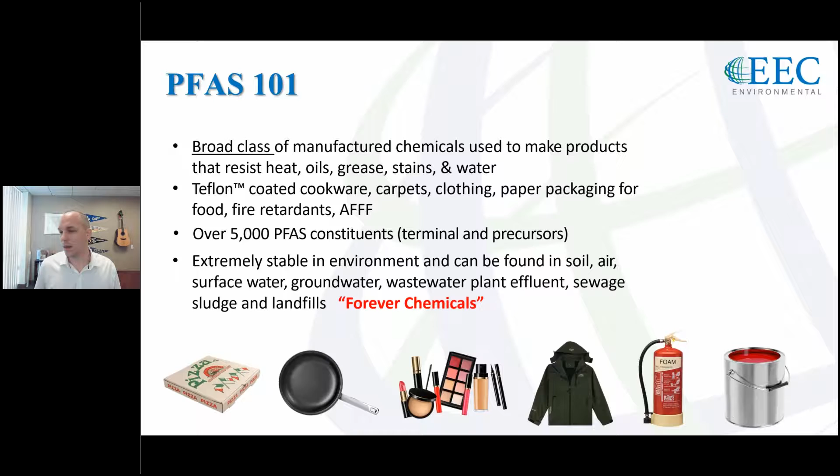A little bit of treatment terminology here that is going to help facilitate this discussion and some of the topics I'm going to talk about. We talk about treatment, PFAS treatment, and what does that really mean? Or PFAS removal. Those terms, treatment and removal, are really general terms that talk about really just taking PFAS out of something. And what does that look like? Well, there's a couple different ways that you can do that. And when you really get down to it, we're talking about

separation technologies. When we're talking about treatment technologies for PFAS, really what we're doing is we're separating PFAS from one process stream or one media into another. So we're not altering the chemistry of PFAS per se when we're talking about these separation technologies, and we're going to go into examples of those, like GAC or ion exchange or RO. We're not changing the PFAS with those technologies. We're really just separating them from the water column, maybe adsorbing them onto a physical media.

And then the other kind of technology within PFAS treatment would be concentration technologies. This is where if we're working within a specific media, like within a liquid matrix, water, for example, technology like foam fractionation will pull the PFAS or concentrate the PFAS within that existing media. And so foam fractionation pulls a lot of the PFAS up into a foam on the top of the water. And so we're concentrating that PFAS. You may have a much higher concentration within the foam than you would within the water column. But again, we're not altering the chemistry of those PFAS constituents necessarily.

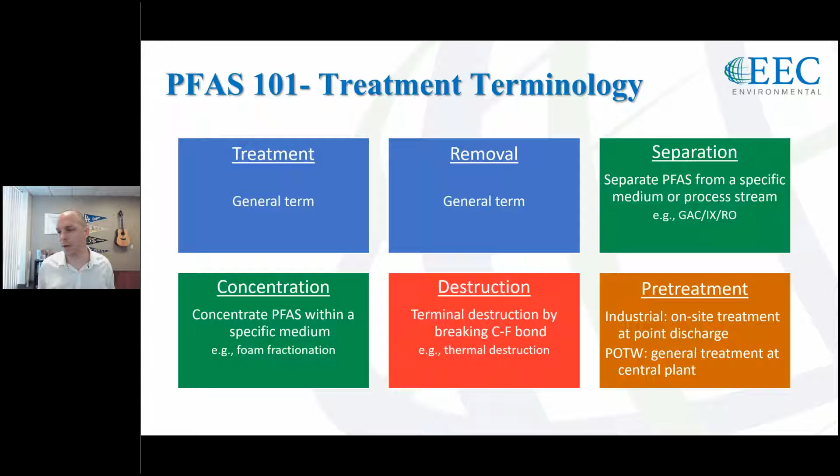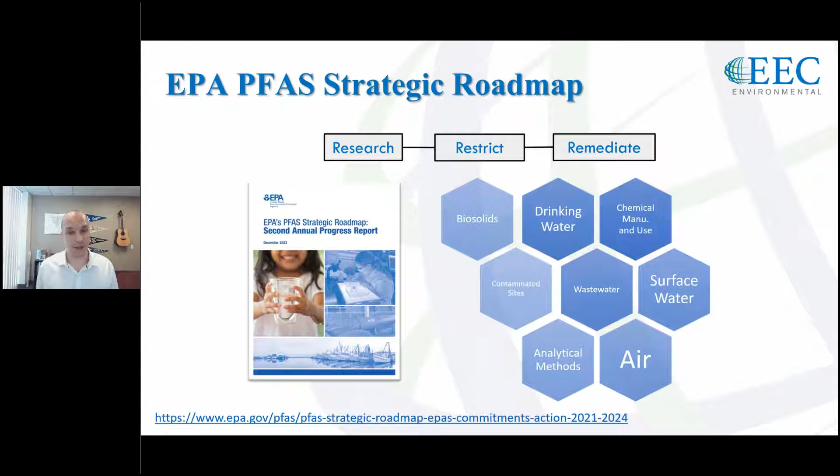Those MCLs are going to be what drives a lot of public water systems across the nation to put in treatment for PFAS if you're above the MCLs and you've got to comply with that MCL. So that's going to be extremely important. That's kind of the first big shoe to drop, if you will.

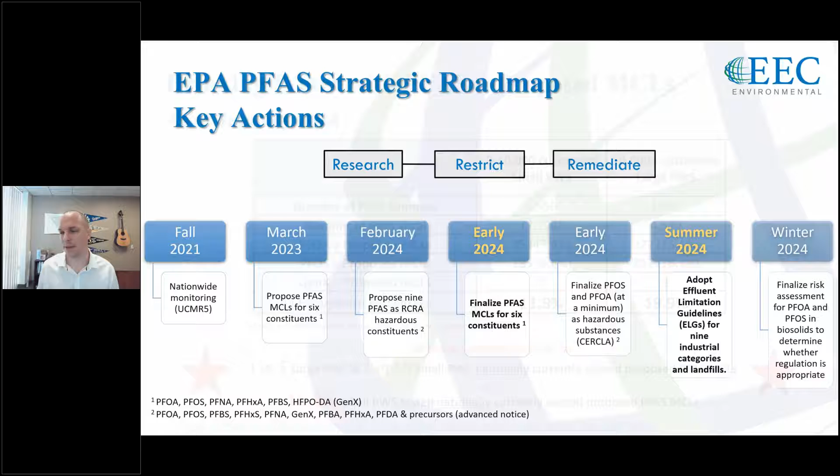I also highlighted here summer 2024, the EPA says they want to adopt ELGs, effluent limitation guidelines, for a number of key industries known to have PFAS and contribute PFAS to the environment in a myriad of different ways. That is more on the wastewater side of things, and that's going to trigger certain industries to put in pre-treatment of PFAS before they discharge to the municipal treatment plant. So those are two key actions that the EPA is planning to take, two key regulations that would drive the need to put in treatment. So I wanted to highlight those here today, and those are early 2024 and summer 2024, which will be here before we know it.

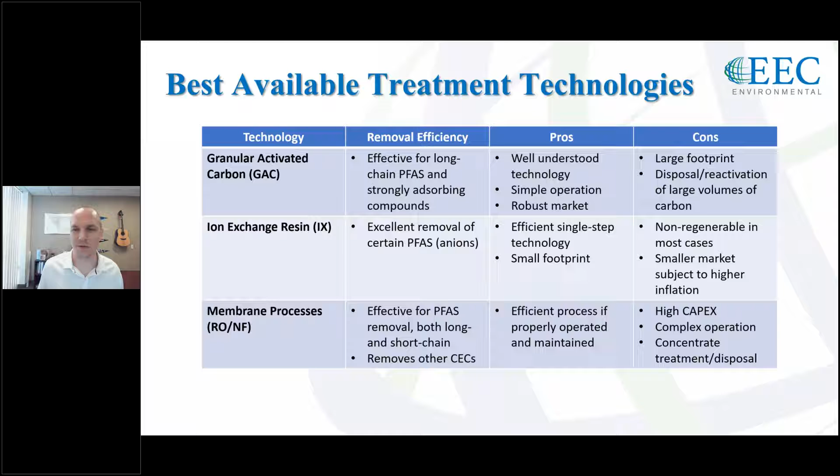So let's look into a little bit more detail on those adsorption technologies, like I said, GAC and ion exchange, and I'm going to add into here novel adsorbents. And it's not necessarily important to understand the difference between every type of GAC or every producer of GAC or ion exchange resins. There's plenty of pilot studies out there that you can look up that have determined the relative effectiveness of each one of these, looking at the breakthrough curves and how long each one is going to continue to treat for PFAS and what the adsorption capacities are. But I like this visual here so we can kind of wrap our heads around what is the difference between GAC, ion exchange, and novel adsorbents.

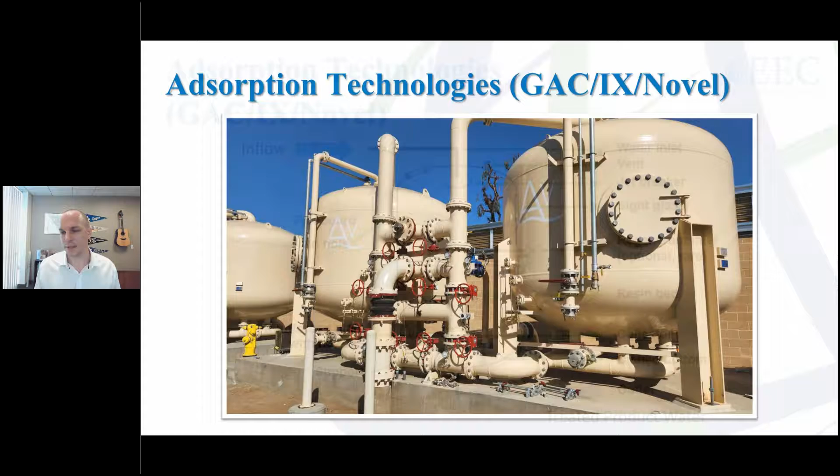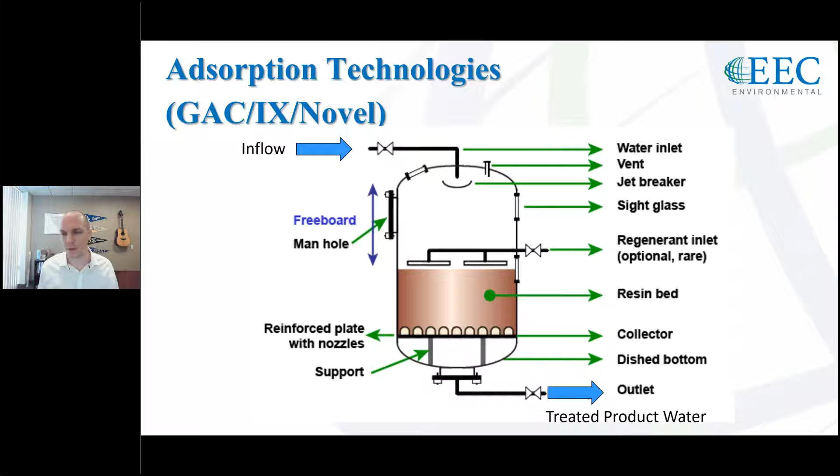And then we've got a couple of different parts to that. We've got manway access for maintenance. We've got a vent there. But look, by and large, this is what we're talking about: flow-through technology in a pressurized vessel that takes advantage of that adsorption within the physical media bed here.

And for GAC, what does that process look like? Granulated activated carbon. This is usually a carbon source. A lot of it is coconut husks that are then activated in a high heat, low oxygen environment. But what it does is the density of pores, and that's why coconut husks and shells are so widely used for this, is they have a ton of tiny little pores within there, a high density of porosity. And that pore space is where the PFAS is adsorbed onto the surface of that GAC particle.

And you saw a picture of that in the palm of someone's hand. That's how small we're talking. And then we've got all these adsorption sites on the surface of that particle. And the benefit of having a high porosity density is you actually have a high surface area that the PFAS can adsorb to. And that's why it's so widely used. And we're talking about the PFAS molecules are oleophilic. They love oil, and so they're held onto that surface as the water passes through.

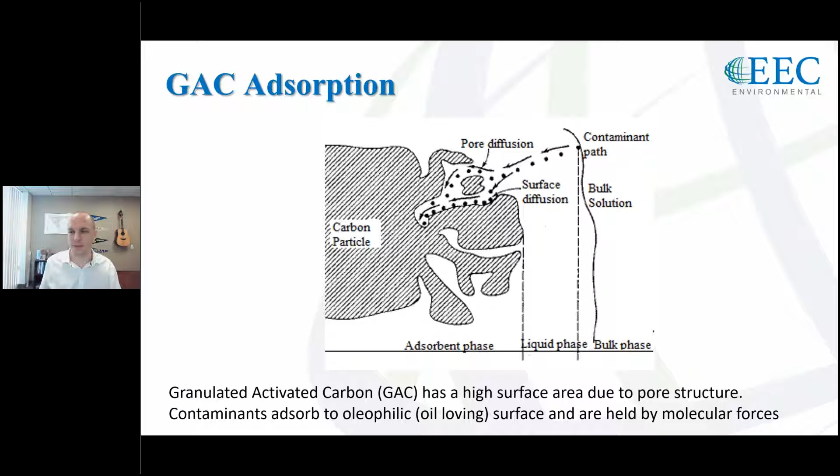Similar but different process for ion exchange. You have these ion exchange resin beads, and you saw that in the palm of my hand there, those yellow beads. And what those do is they're charged with, in this case, chloride ions, and you exchange those ions. So PFAS is an anionic exchange process where the PFAS is adsorbed onto that resin bead, and then through that process, the chloride is exchanged, and you have this harmless ion being exchanged for this harmful ion. So you get chlorides coming out the end, but you adsorb the PFAS molecules onto this resin bead.

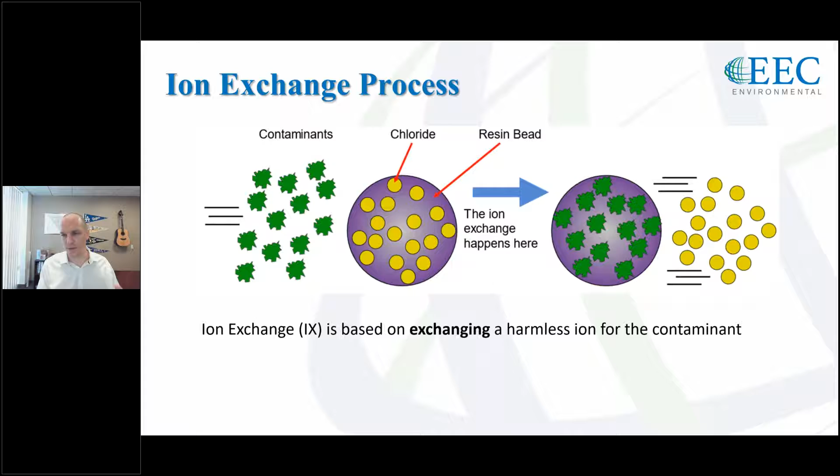And then novel adsorbents act very similar to ion exchange. They have very similar kinetics in that we talked about that flow-through rate for ion exchange versus carbon being much higher. But the difference here for novel adsorbents is they tend to have greater selectivity. And what that means is that anionic exchange process, it's not just going to grab PFAS, it's going to grab other competing anions. Well, novel adsorbents can be a little more selective to just those PFAS anions.

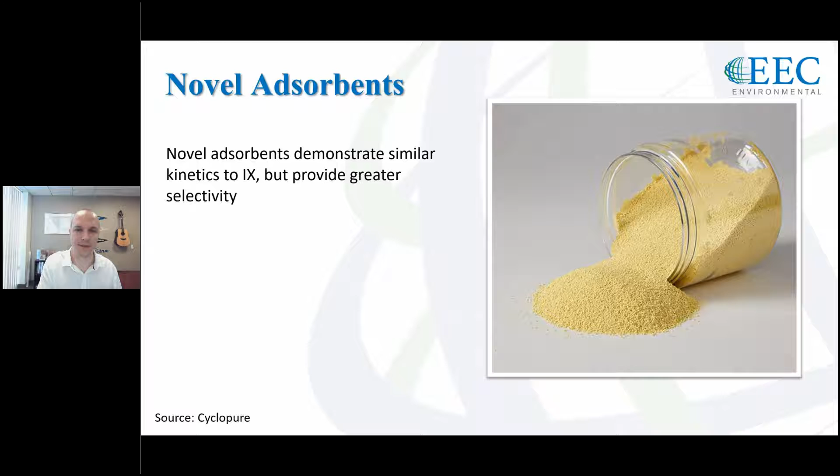And so you may get a greater adsorption capacity for your resin beads or modified clay as opposed to ion exchange, but you still get the same high flow-through or the same kinetics that you would for ion exchange, which means half the vessels when compared to GAC. What that typically looks like when we actually apply that, and there's all sorts of details that go into this. Again, we're just talking high level here.

If you have an existing groundwater source well, or it may be a surface water source like a river or a lake, we'll typically run that through pre-filtration. This may be cartridge filters or sand filtration or bag filters, but some type of pre-filtration. That's just to get the coarse solids out, in order to protect the media beds within the pressure vessels. And then we're going to run it through this lead lag configuration.

This one right here has two different trains, we call them trains, of lead lag pressure vessels. And so you're going to run through the lead vessel, and then that's going to run in series through the lag vessel for redundancy purposes. And then we're out the door here. This one has two trains. You can add 3, 4, 5. And what that does is it just increases the capacity.

So you may have one train, 2 vessels for, say, a 700 GPM well. We may have to add a second train if we've got an additional well or a higher capacity well at 1500 GPM. We may end up with 3 trains for 2000 GPM, and then so on and so forth for additional wells.

And then by the end of this process, we end up, or should end up, with non-detect potable water going to the distribution system, non-detect for those MCL constituents. As we enter the distribution system, we're going to be monitoring there and taking samples to confirm that we have treated effectively for PFAS. We're also going to sample in between the lead and the lag vessels, and that's going to determine this concept called breakthrough.

On the way out, we want to be non-detect. The detection limit, as we discussed in previous webinars, is 2 parts per trillion. The proposed MCLs are 4. Well, that's not a lot of wiggle room between 2 and 4 parts per trillion. That's why we have that lag vessel to provide additional redundant treatment. And then we monitor in the middle there to determine the breakthrough on that lead vessel, in this case PFOA concentration, and we graph that along the way.

That black line is the concentration coming out of the lead vessel. Initially, we're non-detect. It goes down to 0 here, but your detection limit may be 2. And then we start seeing it break through. We start getting detections of 2, 2.2, 2.3 along the way, and we may switch to monthly sampling once we start seeing that breakthrough. And as we approach the MCL of 4, or we may set that a little bit higher, then we're going to change out, that's the red line there. We're going to change out that lead vessel and swap the lead lag configuration.

But don't worry, we've still got that lag vessel providing the redundant treatment, and that's the concentration on the blue line going out the door into the distribution system. We're still well below the detection limit there. But this allows us to get the most capacity out of our lead vessel, and then we'll switch that configuration. So there's a lot more to be said about best management practices for that, but in a nutshell, that's adsorption technology treatment for PFAS removal for drinking water.

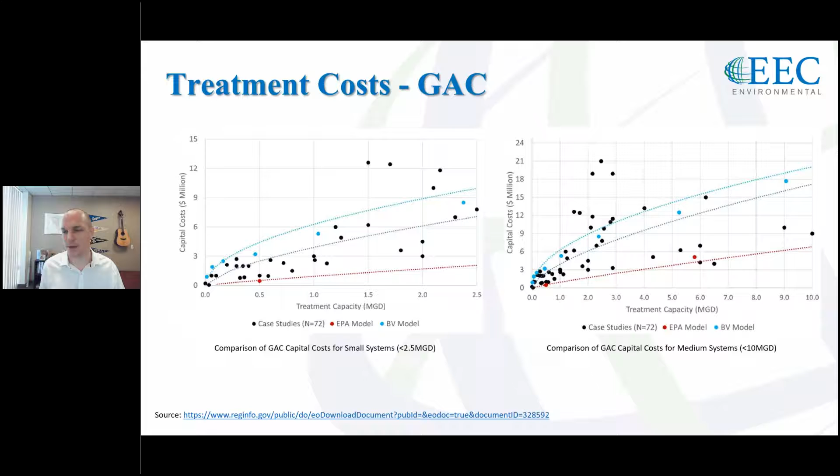If we're talking about a 1 MGD system, which is roughly 700 gallons per minute, you might be looking at somewhere between a cost of 1 to 5 million. I know it's a big range, and it's going to vary regionally across the US as well. But if you're looking at GAC installation for a 1 MGD system, you're looking at anywhere from $1 to $5 million all in to implement treatment. And then you can scale that up at higher flow rates on the right side of the graph. Ion exchange, very similar cost range, actually.

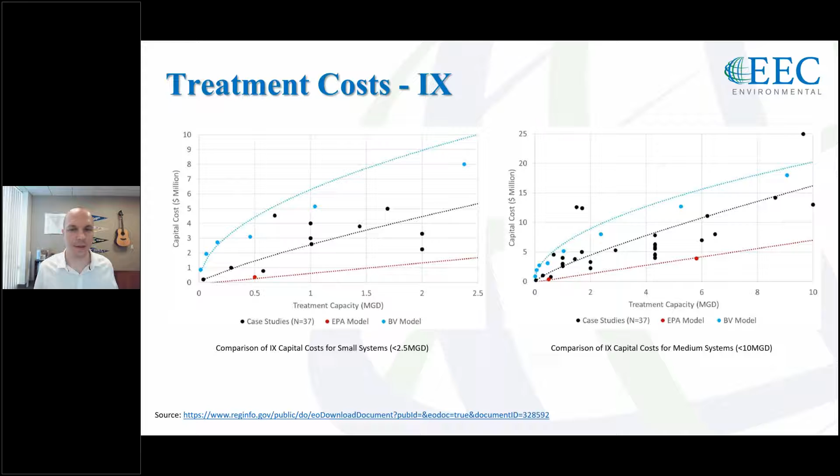If you look again at a 1 MGD, 700 GPM system, we're looking at anywhere from roughly $1 to $5 million. So if you're asking, well, Will, I have PFAS, we've done UCMR5 sampling and we're above proposed MCLs, but we're only just starting to look at what that means, this is a good way to get a ballpark cost range, and then you can start having those conversations about how you're going to fund these capital improvement projects. And when we talk about funding, I'm going to move to RO here as well and just demonstrate here.

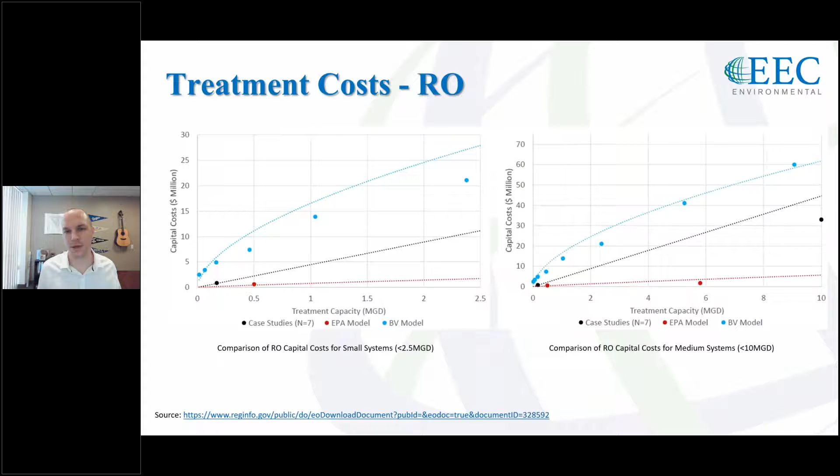When we talk about funding, I'm not going to talk about funding options here today, but I would point you back to the MCL presentation I did for the EFC, where we do explore what some of those funding options are between federal funding and class litigation settlements with 3M and DuPont.

So recap of drinking water treatment here. Again, the good news is there are reliable technologies that exist. They're mature technologies. They've been around for decades, mature markets, lots of different vendors that provide similar types of media and pressure vessels and treatment technologies and equipment. That's the good news. They are efficient. They provide treatment down to non-detect levels, so effective treatment that can help you comply with MCLs.

The one thing I want to stress is to start planning now. If you're doing UCMR 5 sampling or you're scheduled for it, or once MCLs are adopted, we start sampling and determine if we're above the MCLs. Start planning for what that looks like. Engage a consultant. Come up with an alternatives analysis to find the best value option for you.

Start that sampling program. If you have to do piloting as well to find the best value, start that process now. Again, you're going to have 15% of all systems nationally racing to procure this equipment for treatment all around the same time. Once these MCLs are adopted, you got 3 years to comply. So I would stress start now.

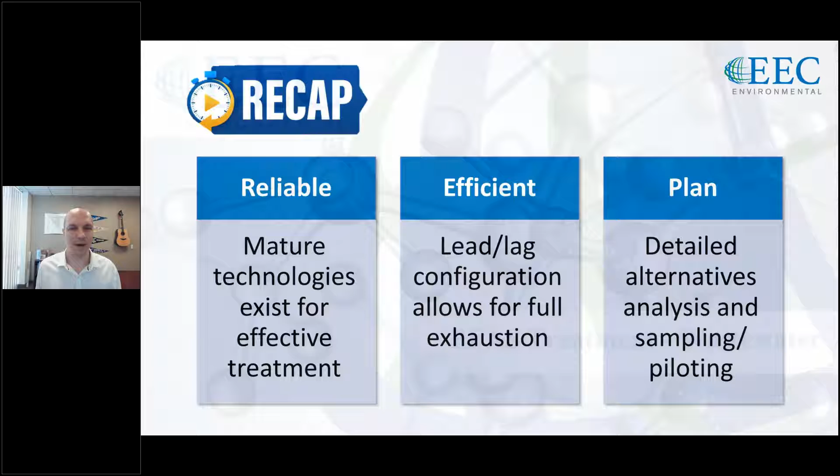With that, we're going to talk a bit about what PFAS treatment looks like and may look like for wastewater. I know there's a number of wastewater folks on the line here, and I want you guys to feel the love as well. And the regulations for wastewater, we don't have a federal limit around the corner any day now type of situation. But what we are seeing is a lot of that is driven by drinking water, right? And then as we move through the environmental chain, if you will, that has an effect.

So what we've got here is the EPA set health advisory levels for, I'm just looking at PFOA, PFOS here, but 4 other PFAS constituents. For PFOA, 4 parts per quadrillion, 0.004 parts per trillion, basically 0. And then for PFOS, 0.02 parts per trillion. Those health advisory levels, HALs, inform the MCLs, the maximum contaminant levels that we're talking about are due to be adopted any day now. Those are proposed at 4 parts per trillion for PFOA, PFOS.

But now we got to protect our drinking water source, whether that's a surface water source or groundwater. So we have state water quality standards. And I'm looking at a case study here specifically in Michigan, and you'll see why as we go through the steps here. In the state of Michigan, they've got WQSs for PFOA of 66 and PFOS of 11. And that informs NPDES effluent limits at the POTW, again, 66 and 11 parts per trillion. That's the water quality standards that those POTWs have to comply with as they discharge treated effluent from the POTW to these drinking water sources, rivers or lakes.

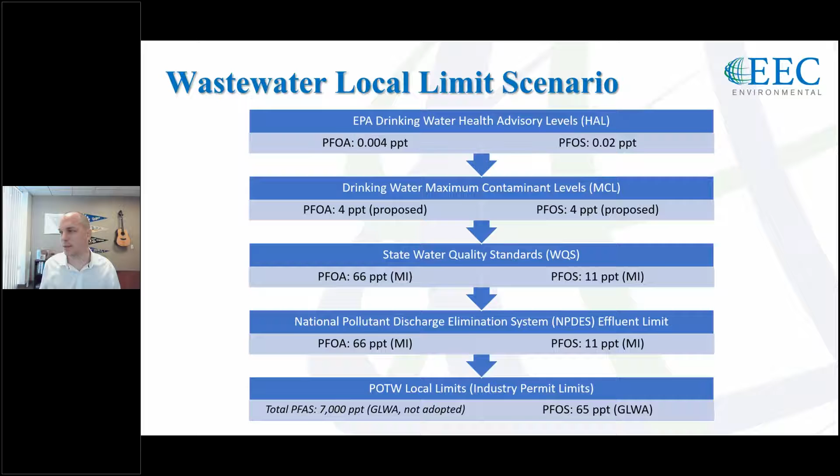And so this is where we're talking about wastewater treatment. You see it in two different spots here. One, the plant dealing with PFAS concentrations and an effluent limit. And then two, industries dealing with what goes out their door and to the plant with local limits. And so it's this industrial side and residential sides. What's coming into the POTW? And does that POTW have a PFAS problem if they're exceeding NPDES effluent limits?

And then we talked about in a previous webinar, is that PFAS coming from controllable industrial sources that can be mitigated by adopting local limits and enforcing on industries and enforcing them to put in treatment? Or is the majority of your PFAS coming from a residential source that we can't control? We can't have every single household put in PFAS treatment. That's unrealistic.

The big problem comes, and this is going to be the case for a number of POTWs across the nation. In fact, it already is, and we're starting to see that. If your main source of PFAS into your POTW is from a residential source, what are we going to do? Again, regulations aren't quite there.

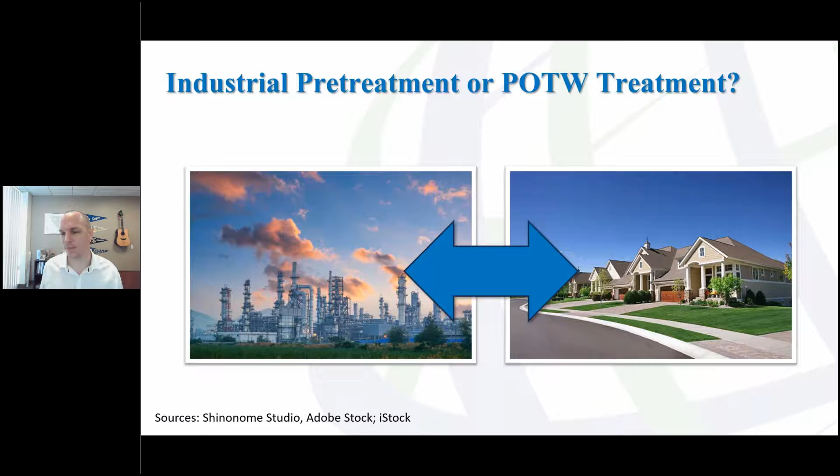This is a little bit of an existential debate at the moment, but I wanted to dive into it a little bit because it's going to inform what treatment technologies are available for wastewater and why we might use them. And with that, I want to look at what your typical POTW does for treatment. Nationally, a lot of POTWs have secondary treatment. We have influent coming in, we do primary settling or screening, secondary biological treatment, and then we're out the door. We have effluent water quality standards to comply with, but generally with biological treatment, we can.

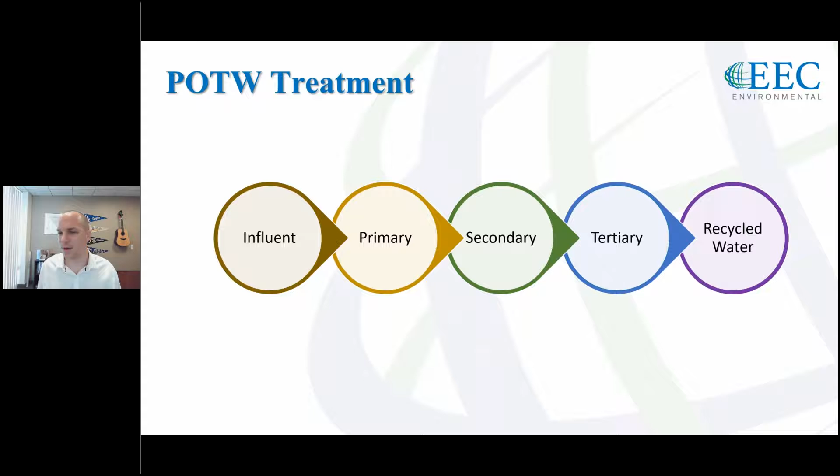Maybe in some parts of the nation, we have tertiary treatment on top of that because we're producing recycled water for beneficial reuse. Then we talk about what kind of wrench PFAS is going to throw in the spokes of a POTW treatment train. We talked about GAC, ion exchange, and RO as effective PFAS separation technologies. Can we just slap that on the end of the treatment train at a typical POTW? No. This is that terminology of pre-treatment I was talking about, pre-treatment at the POTW level.

What that might end up looking like, and this is the big $100 million question, is we've got the influent coming in. Again, primary and secondary treatment is our typical POTW. One, we've got PFAS-laden solids being settled out. We've got biosolids coming out of our secondary treatment train, and we know those to have PFAS in them. But can we just slap GAC and ion exchange at the end of typical biological secondary treatment? No. We're going to chew through carbon. We've got way too many organics in there and other competing constituents.

We'd then pretty much have to go through advanced treatment, microfiltration, ultrafiltration, or RO, before we can polish with GAC or ion exchange in order to meet PFAS effluent limits. And by the time we're done with that, we've pretty much got potable water. In the arid Southwest, we're talking about indirect potable reuse and direct potable reuse. We're pretty much talking about going through advanced treatment for direct potable reuse in order to treat for PFAS if we have to treat at a municipal treatment plant.

And this is the big problem. What it's being driven by is, one, those water quality standards. If they're very strict and we have a residential source that we can't control, this may be the reality for some treatment plants across the nation. And then we've got other regulations coming down the pipe, CERCLA and RCRA hazardous substances designations, and you see all these PFAS arrows coming out the bottom. We've got PFAS solids and biosolids and RO reject stream and solid media from adsorption technologies. If those are all designated as hazardous wastes, that's going to be a whole other problem in and of itself.

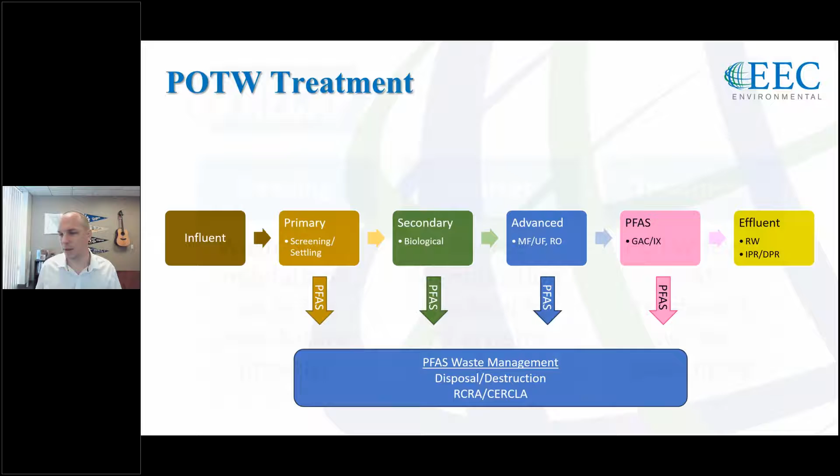So, recap of wastewater treatment. Wastewater regulations are coming. If we've got drinking water MCLs being adopted, that's going to start informing water quality standards and NPDES effluent limits that treatment systems will have to comply with. In order to comply with that, source identification is going to be extremely important. Like I said, is it a residential or an industrial source?

If it's industrial, and we can determine that through collection system sampling and industrial source sampling through our IPP programs, then we can regulate those industries, reduce our influent loading, and achieve compliance at the treatment plant. But if it's a residential, uncontrollable problem, that's a whole other conversation. And if that's the case, treatment is going to be extremely challenging.

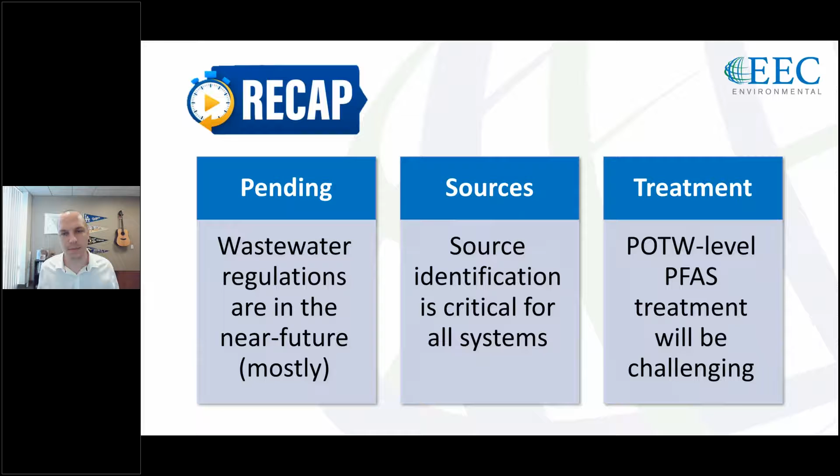Now, we saw all those PFAS arrows coming out of the wastewater treatment plant, and I want to briefly touch on waste destruction, because this may be the solution here if we've got a hazardous designation for all of this PFAS-laden waste. All these separation technologies, like I said, aren't destroying PFAS, aren't changing PFAS necessarily. You still have PFAS coming out, and it has to be managed.

Destruction technologies are emerging and are starting to look like they may be the ultimate solution to PFAS within the environmental industry. High-level introduction: there are guidances from the EPA and the DoD on PFAS waste disposal and destruction that can help guide us if we find ourselves with a PFAS-laden waste stream that we have to handle and dispose of, whether that's hazardous or not. So I point you to those resources here.

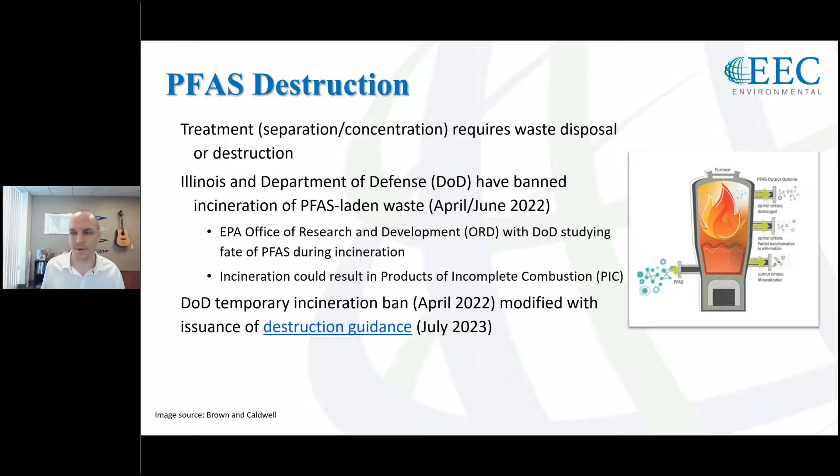When we talk about destruction, we're talking about defluorination, breaking the carbon-fluorine bond. We're still demonstrating the effectiveness of that by continually developing additional analytical methods that help us do fluorine mass balance to show that we're actually destroying PFAS and breaking that fluorine bond, as opposed to breaking it down into shorter chain PFAS. So incineration at a high enough temperature, I think it's 1100 degrees Celsius to break that carbon-fluorine bond, is an effective destruction technology.

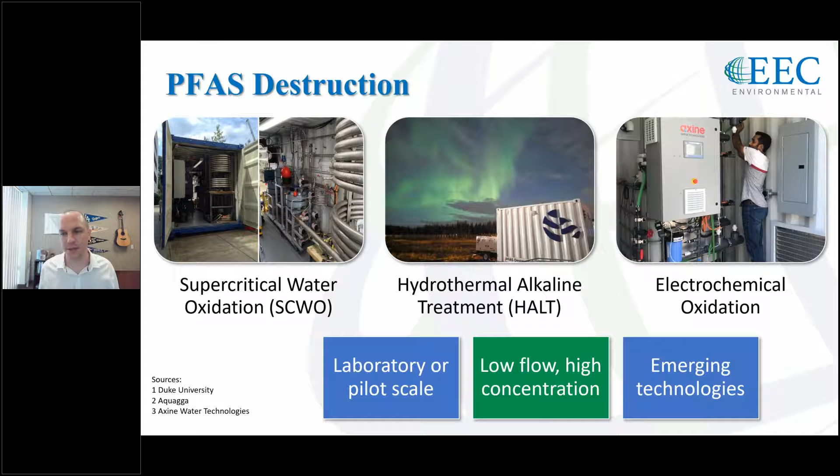There are also emerging destruction technologies being developed, piloted and demonstrated: supercritical water oxidation (SCWO), hydrothermal alkaline treatment (HALT), and electrochemical oxidation, among others. These are at pilot scale, some at laboratory scale. Typically, they're low flow, high concentration solutions, so we can't just slap this on at the end of a 2 MGD wastewater treatment plant. That's too high of a flow at current scale. They're working on scaling these technologies because the need for PFAS destruction across the nation is so great.

In my opinion, what we might start seeing are what I call regional PFAS management facilities, maybe CWTs, centralized waste treatment facilities, popping up to meet the demand of all this spent resin and spent GAC media that needs to be disposed of or destroyed. You may start seeing these facilities accepting that waste and providing an end of the line solution for a lot of systems nationally.

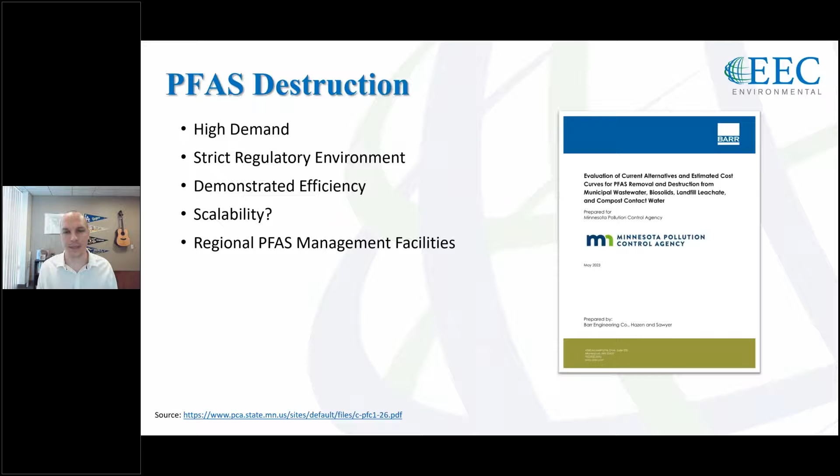So that's the end of my webinar. I want to highlight a couple of things. One, there is an immediate regulation coming, the drinking water MCLs, that will start the need for treatment nationally for drinking water in particular. Again, 10 to 20% of public drinking water systems nationally are likely to require treatment. The good news is that mature treatment options and technologies already exist and can be implemented to provide that level of treatment.

Wastewater is a much bigger question. Right now, I would encourage wastewater systems to start the process of source identification to determine what your sources are and if those are manageable. That's going to be the easiest option moving forward: source identification and source reduction if possible. And then there is a cost component and a technical assistance component of all of this. There's a lot of information provided today, and a lot more details that I didn't go into.

I would encourage you to reach out to your local EFC branch within the EFC network and the local rep there with any questions you have about PFAS and how you're going to manage this. They're here to provide that technical assistance. They can point you to resources for funding options to implement these projects, and they're going to be a huge resource for you moving forward.